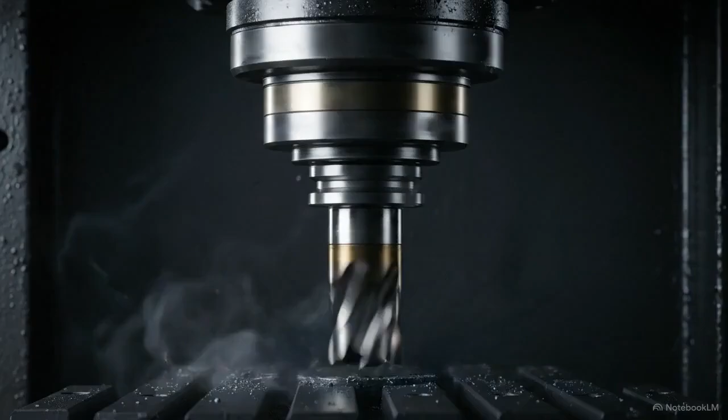Urgent. A high-speed milling spindle comes to a dead stop mid-cycle. The sparks fade, and the shop floor goes completely quiet. That sudden silence indicates an idle machine eating into your operating margins. Every minute that spindle sits waiting for raw material, a promised delivery date for a key client moves further out

of reach. This situation often traces back to the procurement phase. A supplier offers a reduction in upfront pricing, but they lack the logistics to guarantee their delivery times. The small savings on the initial invoice are lost the moment the shop floor is forced to wait.

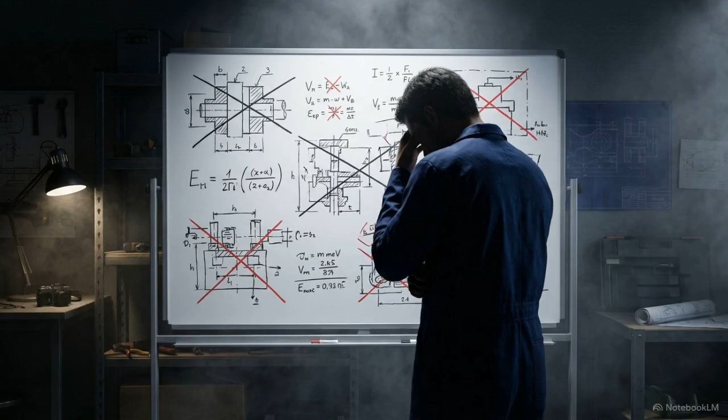Talk to any toolroom manager, and they will explain that their biggest hurdle is rarely machining capability or engineering talent. The real choke point is the friction of sourcing reliable inputs. Operating with an unpredictable supply chain creates a cycle of reactive decision-making. When delivery dates become suggestions, the shop loses its ability to schedule work efficiently, which damages its market position and the trust of its customers.

Despite these operational risks, the procurement conversation frequently stalls on the upfront price tag. Buyers often overlook the total operational value that comes with material reliability. This text from a sales psychology framework suggests that when buyers push back on price, it is an indicator of active engagement. They are seriously considering the product, but they require clarification on the specific benefits of the purchase.

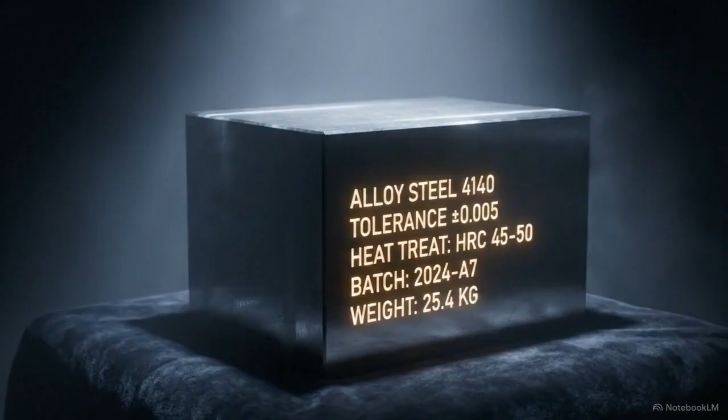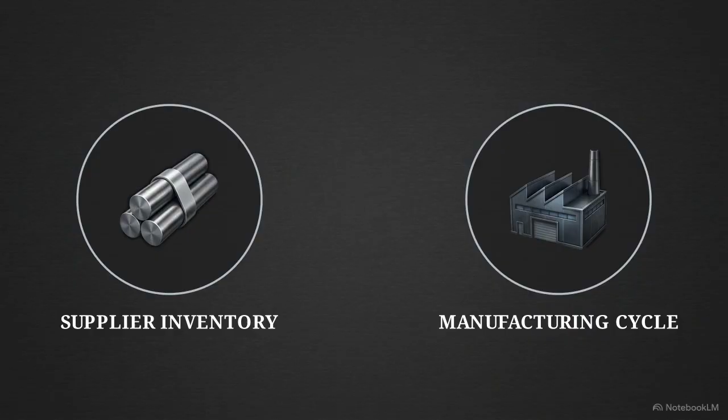Reframing the terminology clarifies the nature of the transaction. Describing a material as premium grounds the negotiation in the acquisition of a specific high-performance asset that meets exact technical requirements. However, psychological reframing requires physical evidence to be effective. To justify the procurement strategy, a supplier must provide undeniable proof that their logistics can sustain the manufacturing schedule.

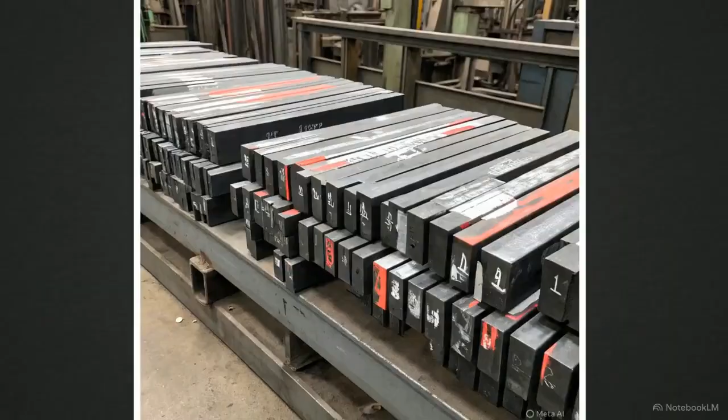This photograph shows the inventory floor at Alma Steel and Alloys in Pune. The volume of dark rectangular steel bars on these shelves provides physical proof of their ready stock claim, a deliberate buffer against supply chain friction.

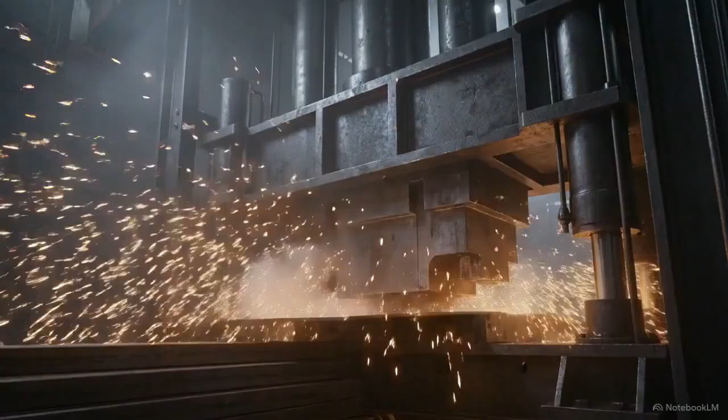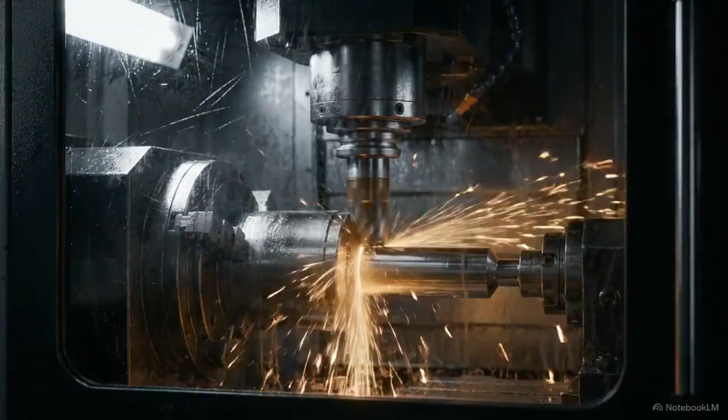Guaranteed immediate access to these exact materials means a machine shop can maintain its production velocity. This inventory acts as a firewall against the delays that stop a shop floor.

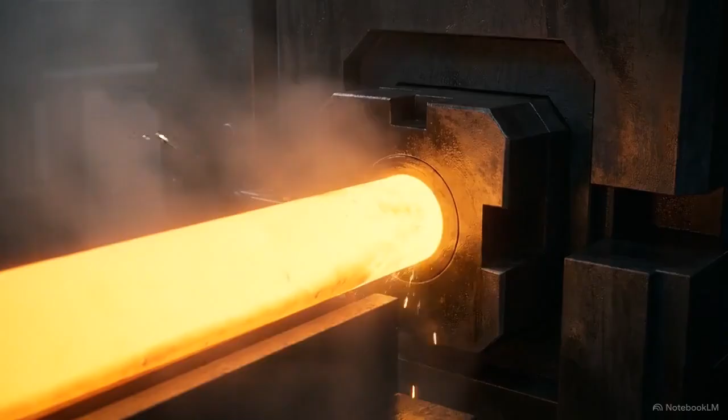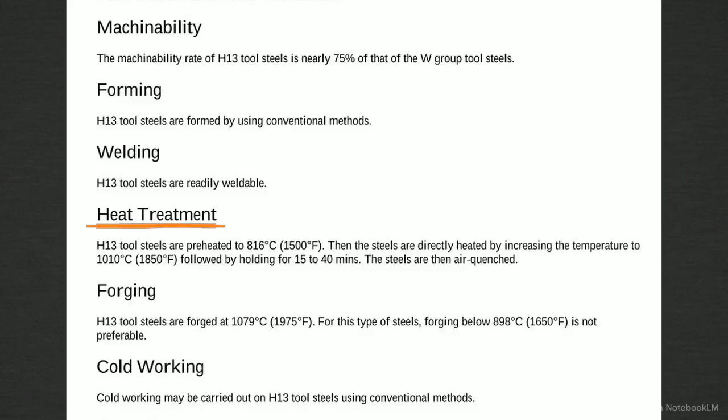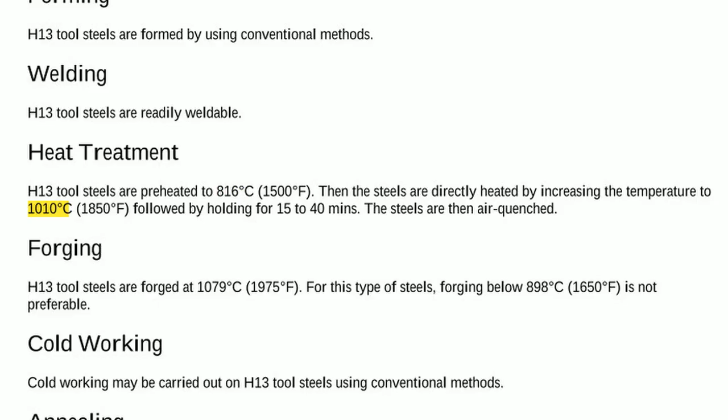The requirements are even more stringent for hot work applications. Forming precision extrusion dies requires alloys with high toughness and fatigue resistance to withstand extreme repeating thermal stress. This datasheet specifies the heat treatment protocol for H13 chromium steel. It mandates a preheating phase at 816 degrees Celsius, followed by a direct heat increase to 1010 degrees, which is necessary to lock in the steel's structural integrity.

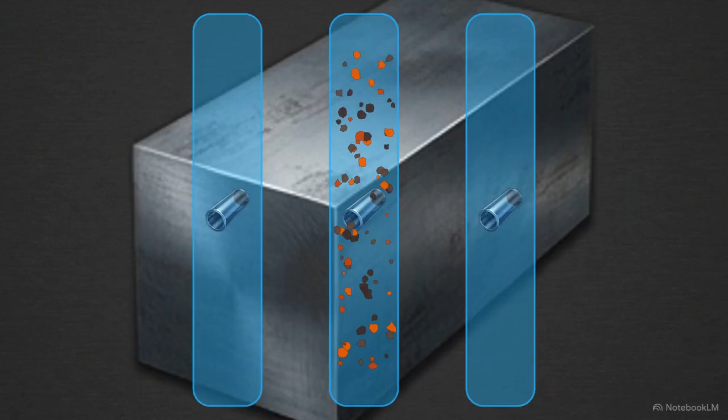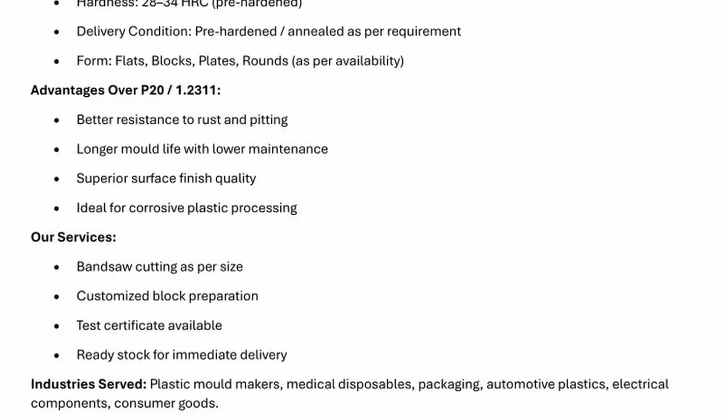A different set of metallurgical challenges arises in plastic mold manufacturing. Molds require internal channels for cooling water, and in high humidity environments, those channels are susceptible to hidden corrosion and pitting. This sheet for 1.2316 stainless mold steel highlights better resistance to rust and pitting, protecting cooling channel integrity. The Industry Served section shows why this purity is required. Medical disposables and automotive plastics demand a superior surface finish.

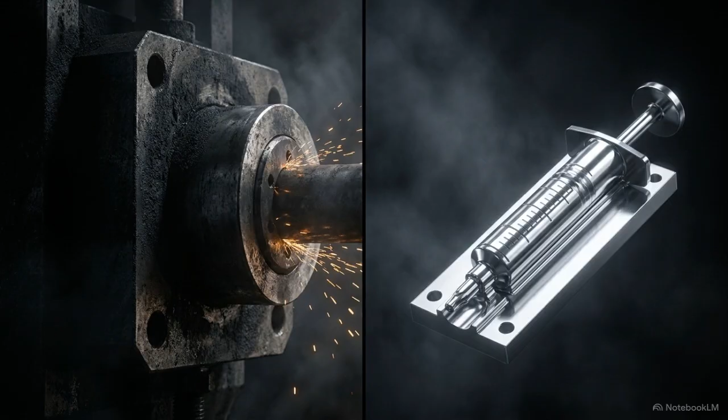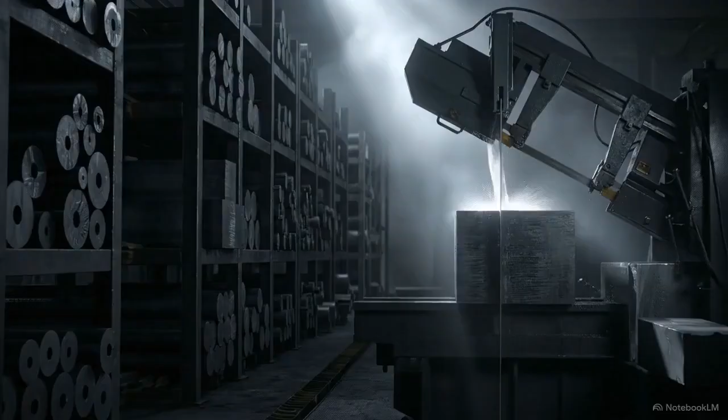Specifying H13 for an extrusion die or 1.2316 for a medical mold is only effective if the supplier can guarantee the certified, authentic grade exactly when it is needed. That reliability depends on the supplier's floor capabilities. Almas handles custom block preparation and precision bandsaw cutting directly in-house, alongside their storage operations. Combining certified technical authenticity with ready stock and immediate cut-to-size dispatch addresses the primary causes of production delays.